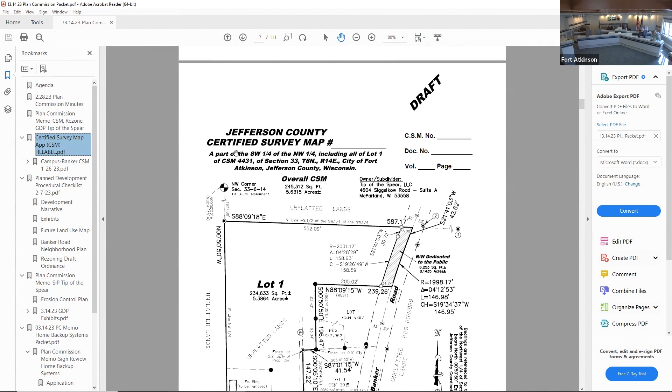So without further ado, we'll walk through the first item, the certified survey map. The CSM you see here is taking what is currently 2 lots - this small rectangle in the lower left-hand corner, and the more jigsaw piece puzzle that you see there is the 2nd lot - and combining both lots into a single lot. This meets all of the requirements of the city's zoning code. City staff have reviewed it and have no concerns related to the CSM. I'd be happy to answer any questions the Planning Commission might have about the CSM.

I recommend that the Planning Commission recommend to the City Council acceptance of the certified survey map for Tip of the Spear LLC. Second. We have a motion and a second on the floor. Engineer Sully, were there any conditions that needed to be placed on that recommendation? No conditions related to the CSM. Any further discussion by any Plan Commission members? Hearing none, all those in favor, please signify by saying aye. Aye. Any opposed? That motion carries.

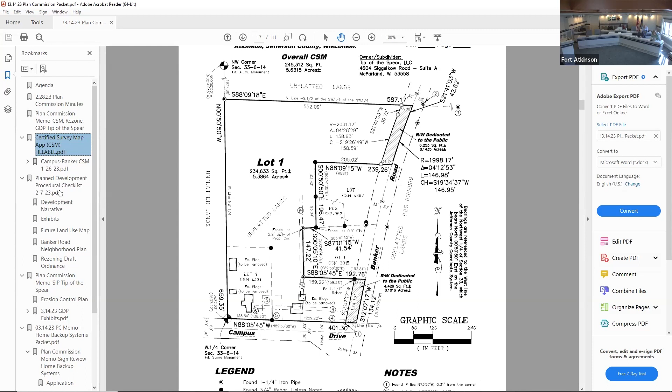Number 5 on the agenda is review and possible recommendation to the City Council related to the rezoning to planned unit development, the general development plan for the Tip of the Spear residential development proposed at 1310 and 1320 Campus Drive. So this is where we talk through the rezoning and capture those flexibilities within the general development plan.

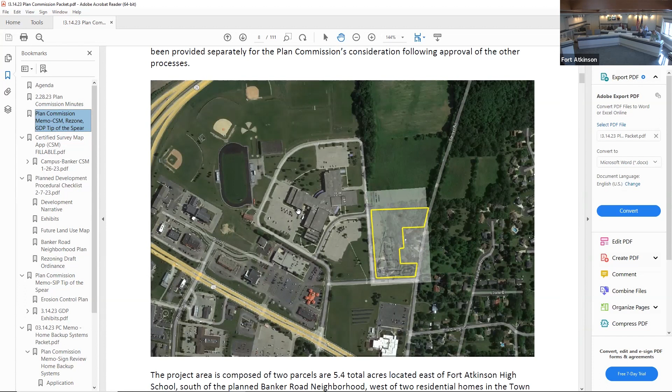So the current zoning for this parcel is SR2. It was reflected as such when it was annexed into the city, about a year ago. The proposal in front of us is to look at the addition of 2 buildings. This is roughly where it's located in relation to the high school, and the 2 buildings are shown here.

So Campus Drive is to the left or west, and the high school access road is to the north or top of this figure. The proposal is for 2 phases. The first phase is what we'll be looking at in more detail in the SIP. The second phase is shown there, but we'll return to the Planning Commission for approval when that phase is ready to move forward.

There are a few flexibilities required with this particular request, and those flexibilities stem from the underlying zoning district that makes the most sense for this, which is the MRH 30 zoning district. MRH is multifamily residential. H is a heavy designation, meaning a high density area.

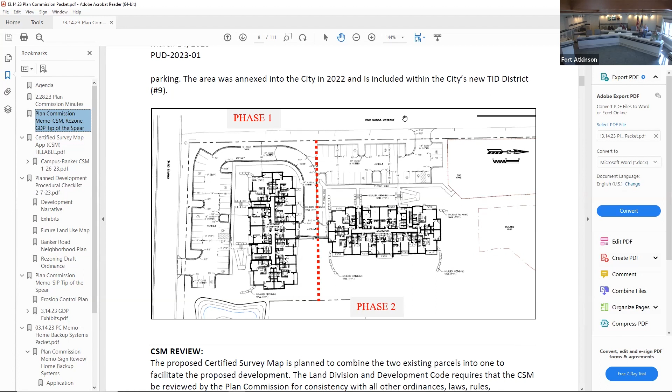MRH 30 zoning requires a number of things, all of which this complies with, except for 3 areas that we noted. The first is related to pavement setbacks. And I should note, as I did in the memo, that the pavement setbacks on this particular project are met because this is not a public road up here along the high school driveway.

But as we noted in the January 24th concept proposal, the city is in discussions with the school district of Fort Atkinson to make that a public road. So we are going to include a flexibility for varying that setback in that area, specific just to this area that we've noted within the memo.

The reason for that is the retention basin immediately to the east of this particular building is required on the site, and that puts the building a little too close to the overflow or flood elevation of that. So the flexibility required there is something we feel we can accommodate.

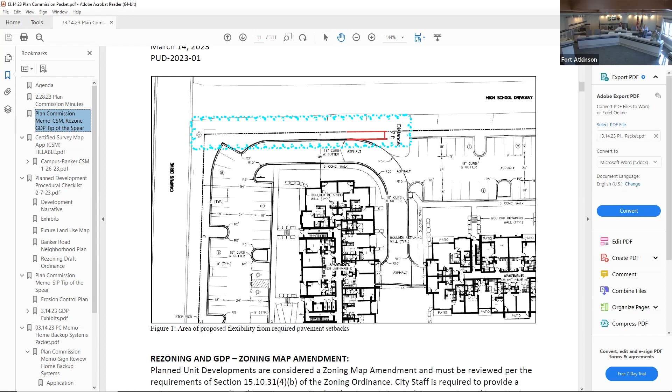The second is related to the building height, and we'll look at those in the SIP. I don't have a visual of that in this memo, but the building height within the MRH 30 zoning district is limited to 45 feet. These structures will be 51.25 feet, so about 6 and a quarter feet higher than is allowed.

And that is due to the underground parking that will be added into these 2 buildings. The third is a garage setback, which seems a little counterintuitive as there are no garages necessarily, but there is an underground garage within the footprint of the building. So we'll allow that flexibility. The code indicates it should be set back 2 feet from the principal structure, but putting it on top of the building doesn't necessarily work in that situation.

So all 3 of these, from staff's point of view, are fairly minor flexibilities. What we'll be looking at is approving the zoning to the PUD with the MRH 30 zoning as the underlying zoning, with those 3 flexibilities that I just mentioned. If Planning Commission has any questions related to this, I'd be happy to entertain them now.

Have we heard any complaints or concerns from anyone else in the neighborhood or neighbors to this property? We have not received anything formal. I have not received anything informal either. I don't know if any other staff members or Planning Commission members have. I have not received anything. I haven't either.

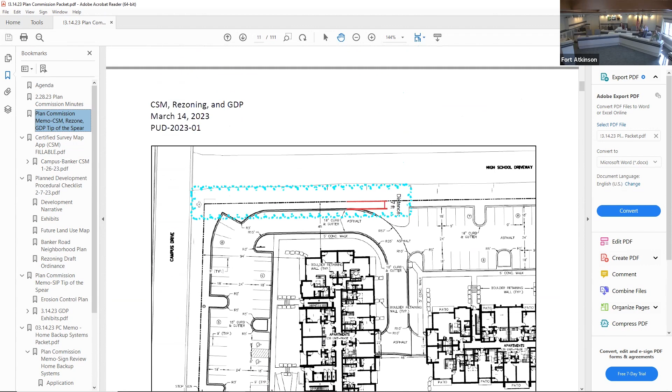We have talked to the school district, as I said, Commissioner Schultz, about this, so they're aware of it. They view it as a positive. I think the other thing we might note is that to the east, this is all surrounded by town land within this area too, so they may not be paying as much attention, for lack of a better word, to the City of Fort Atkinson's Planning Commission. But I will note that as part of the noticing requirements for a rezone, the clerk of the town of Koshkonong was notified.

All right, thank you.

Are there, Engineer Selly, any recommended conditions on the recommendation from staff that the Plan Commission recommend the City Council approve this general development plan? The only conditions are these 3 flexibilities that should be noted. They're within the memo and can be noted in the approval as well. I should note, the general development plan will also come before city council for review at that body. The SIP, which we'll deal with next, is only approved by the planning commission. It will not go to the city council.

I'll move a recommendation to the city that the city council consider the rezoning of this site to the planned unit development, general development plan GDP for Tip of the Spear, with the exceptions noted.

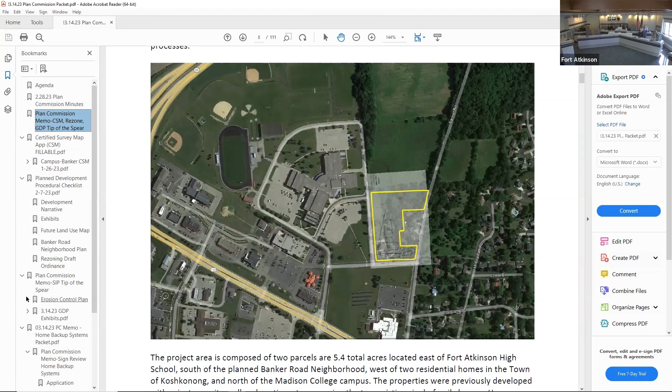Second. Okay, we have a motion and a second on the floor. Any further questions, comments, or discussion by the Plan Commission? Hearing none, all those in favor, please signify by saying aye. Aye. Any opposed? Okay, that motion carries. Thank you.

Item number 6 on the agenda is review and possible action relating to the planned unit development specific implementation plan, or SIP, for the Tip of the Spear residential development proposed at 1310 and 1320 Campus Drive.

So as I mentioned, the SIP is really akin to the site plan review that we're used to seeing here at the Planning Commission.

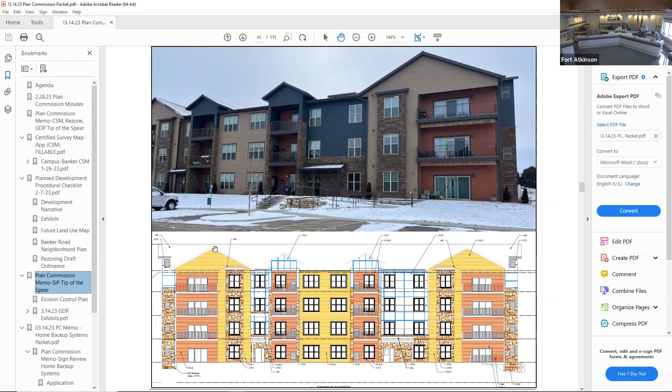The height that I was mentioning earlier is easily understood here with respect to how high these buildings are relative to the underground parking that's necessary here.

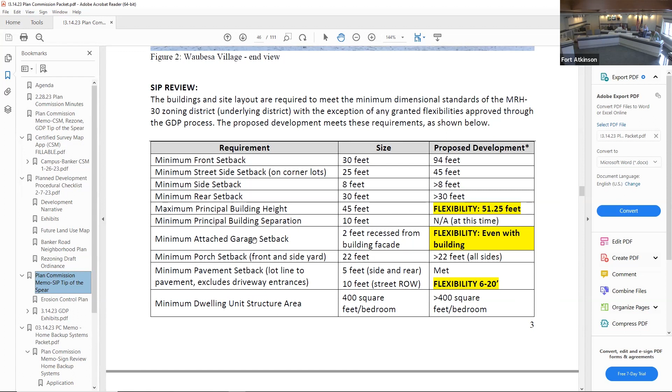The site plan itself, here's an end view of that as well. The site plan was reviewed against the zoning code. There are the 3 flexibilities that we mentioned earlier and have approved: the pavement setback, the attached garage setback, and the flexibility for the building height. Everything else proposed on the site, for phase 1, meets the zoning code and we have no concerns.

All of the city staff reviewed this plan. Those that did have comments, I'll bring those up here for us to talk about.

On the engineering side, I wanted to remind Planning Commission that we do have traffic impacts within this area, not only from this development but also additional developments coming before us for review shortly. The city has engaged a traffic impact analysis with GRAEF, a consultant with expertise in such matters within Fort Atkinson. They are beginning data collection on Monday, and we'll have results probably within the next month, so we'll be well ahead of any potential impacts to traffic in this area.

This first phase, with 1 building and 36 units, is not expected to have much, if any, impact on traffic in the area. As we continue to build with this development and the additional developments, we want to make sure we've planned ahead for any changes or management decisions that need to be made.

The other area we wanted to mention was there were wetlands noted on the site. The developer, Mr. Quam, has reached out to the DNR and provided a letter indicating there is opportunity for some limited filling of wetlands to accommodate this development. As we move forward with more formal submittals for permits at the state level, we'll want to make sure we have our review from the DNR and letters in hand confirming that is accommodated.

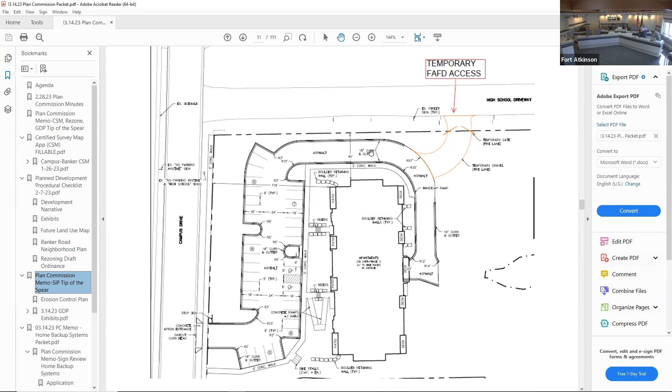The last thing I wanted to note was on the landscaping side of things. There are—if you'll bear with me just a moment—some of the plans to bring up.

In the concept plan phase, I think it was Commissioner Kesnick that noted this large pine tree. The developer surveyed it and has accommodated that pine tree down in this lower left-hand corner within the stormwater basin. In addition, there are a number of oak trees that are fairly sizable on the site, and the developer is trying to make sure those can be accommodated as well.

So we've actually had discussions about pushing the building further to the north in order to catch these oak trees within parking areas and parking bump-outs, so that we can preserve those monument trees on the site.

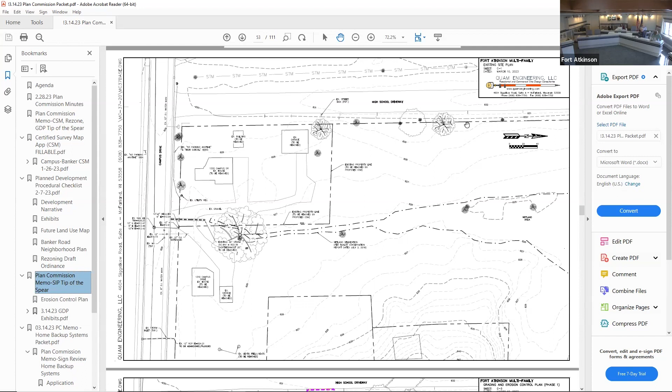The other aspect associated with landscaping I wanted to bring to the Commission's attention: we requested that this frontage area along Campus Drive be set back a little further with some berms, or some sort of aesthetic landscaping feature, just to break up the parking lot that will be in front of the building.

We did talk to the developer about putting the parking lot behind the building, to which he pointed out, I think correctly, that this removes the view shed of the rear of the building within the setting. So we felt that providing these berms on the street-facing side would do well to break up the parking area there.

There will be a fair bit of underground parking as well, so I think that will help mitigate the vehicles and things of that nature in the parking area.

We do have a couple of different requests, or conditions I should say, related to this request, and those are noted in the recommendations. The developer has added these things to the plan that we're looking at.

Sidewalks will be added to the full length of the Campus Drive frontage along this side. There are a couple of hydrants that may be in the way, and the city has committed to moving those. But we would like sidewalks up and running as soon as occupancy of this building is allowed.

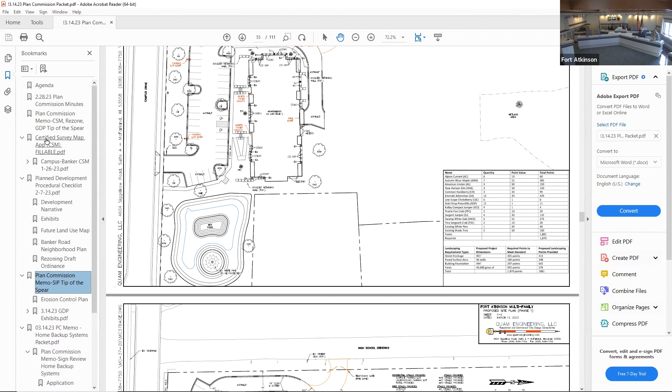I was just looking at the Vandewalle and Associates concept plan for this planned unit development, and it appears to me that the buildings and the wetlands and stormwater retention are essentially flipped east and west from how they were shown on the concept plan.

That concept plan is actually for the city-owned property to the north. So the property we're looking at right now is along Campus Drive.

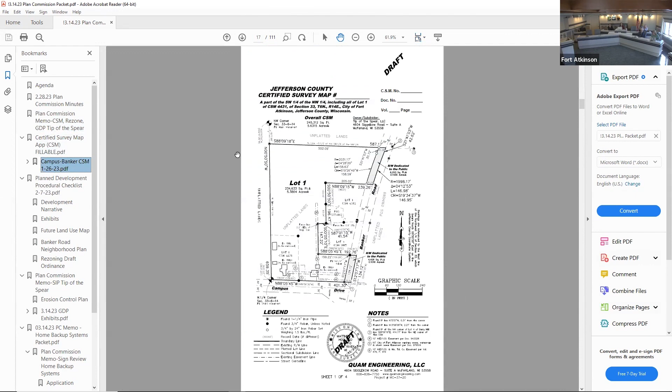So it is south of that concept plan. I do have that in here, trying to bring it up. It's a little confusing. I think that was just included in the packet as a reference point for what is planned, generally speaking. Because it's not platted, that was just approved in concept, so even development that does move forward in that area might not look exactly the same as that concept plan.

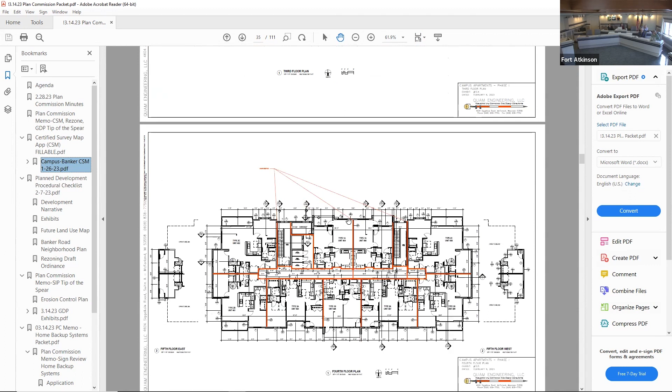I just wanted to make sure, if it was flipped, that there weren't any concerns with stormwater and water management. Stormwater will be something we're taking a little more seriously with this, because this is the low spot, right? So everything within that 75 acres upslope will drain down into this area. Mr. Quam did submit a stormwater report along with some erosion control information that I reviewed and it met the requirements.

I have a question regarding the traffic survey. What possible changes could be made to the traffic pattern or streets themselves based on conclusions from the traffic study? I think, as I said, with phase one at 36 units, we may see very little. The one intersection that concerns me a bit even now is the Banker Road and Madison Avenue intersection, specifically the left turn out of that intersection. If you're facing south on Banker Road trying to turn left onto Madison Avenue, that's an area that's been on our radar for a bit.

City staff has talked about potentially eliminating that left turn there. The TIA will take a look at that, and I would not be surprised if an immediate suggestion is that we eliminate that left turn. My expectation beyond that, as we grow in density here, is that we may need some additional intersection control that's not at Lexington and Madison Avenue. That would kick in if the school district ever decides to move a middle school into the area, and we would have a potential vacation of Campus Drive. Then we would have a difficult time getting all these residential folks over to a controlled intersection. So I could see taking that controlled intersection at Lexington and perhaps moving it to Banker.

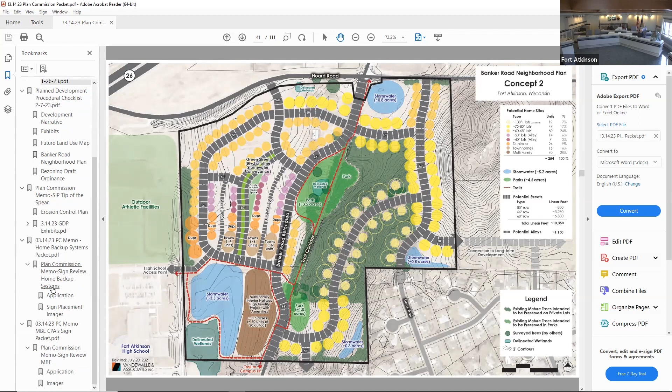I move the approval of the planned unit development specific implementation plan, SIP, for the Tip of the Spear, subject to the recommendations made by city staff. I will second. Okay, we have a motion and a second on the floor. Any final questions or discussion points by the Plan Commission? All those in favor, please signify by saying aye. Aye. Any opposed? Okay, that motion carries.

Item number 7 on the agenda is review and possible action relating to a site plan review for signage for Home Backup Systems LLC, for the property located at 615 Madison Avenue.

So this is a pretty easy one. It's a single backlit sign on the north side of the building facing Madison Avenue. Every business is allowed a minimum of 40 square feet of wall signage, regardless of facade length, and they are meeting that. It is backlit, as I said, but it will have an automatic timer, which is required for this area so that the lit sign can be turned off at the end of business hours, since it is facing a residential district.

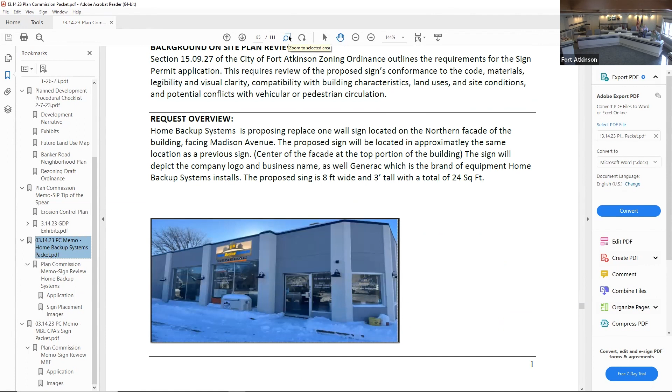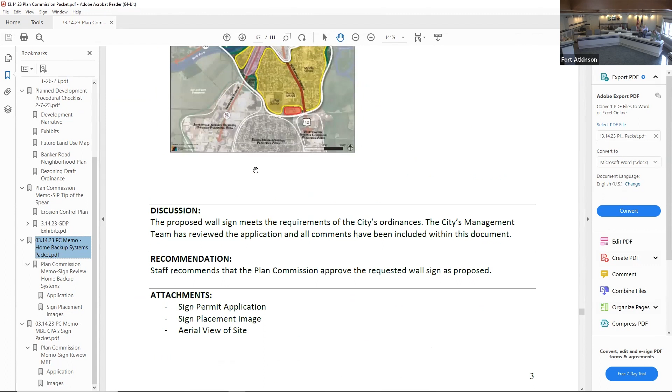Other than that, it's pretty straightforward. It's a new sign on the front of the building. They did do some improvements on the building over this last summer, so this is just the final step to end that procedure.

Yes, I did notice those improvements to the facade. They look nice, I think this sign will also complement the building.

I just have a couple questions, mostly clarifications. So the minimum size is 40 square feet? That's the minimum for every business, regardless of the length of the facade, because most wall signs are based off your facade length, but not every facade is 40 feet long. So the minimum they are allowed is 40, and then from there, if your facade is longer than 40, you can increase per foot of your facade length.

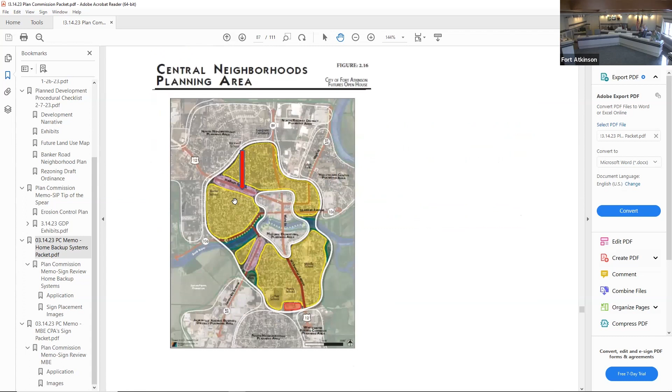It looked to me like in one part of the request that the proposed sign was 24 square feet, and then on the drawing it looked like it was 32 square feet, so I just wanted to ask about that discrepancy on the sign contractor's drawing.

That may be the Generac sign below there that I may have overlooked, but it does fall underneath the 40 square feet allowed. The dimensions that were provided to me from Mike Forrester were the ones indicating the 24 square feet.

I'm still a little confused about the minimum of 40 square feet, but I'll... I think it's a minimum facade length of 40 feet. So everybody's given a credit, basically a credit of 40 feet, because you could have a tenant space in a strip mall that's only 20 feet wide. Got it, got it. You'll see that come up actually on the next sign, which is less than 40 square feet or 40 linear feet, so we'll address that on the next one as well. Thank you. You're welcome.

Any questions of staff on this item from the Plan Commission? Okay, if there aren't any, I would entertain a motion.

Approve the site plan review for the signage at Home Backup Systems LLC for the property located at 615 Madison Avenue. So moved. Second. Okay, we have a motion and a second. All those in favor, please signify by saying aye. Aye. Any opposed? Okay, that motion carries.